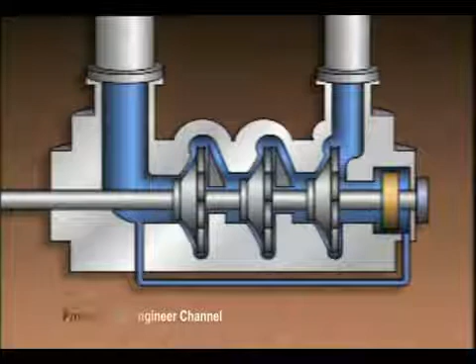This pump has a balance piston. During operation, some of the fluid leaving the pump flows along the shaft and exerts pressure against the balance piston. That pressure tends to force the pump shaft away from the suction eyes and reduces the total thrust. Any fluid that passes by the balance piston is returned to the suction side of the first stage.

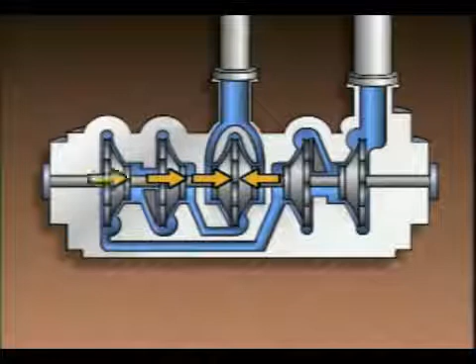Now on this pump, the arrangement of the impellers is used to offset axial thrust. Process liquid enters the first stage impeller from both sides, so the pressures on both sides of the impeller are equal. The suction eyes for the second stage and third stage impellers face in the opposite direction from the suction eyes of the fourth stage and fifth stage impellers.

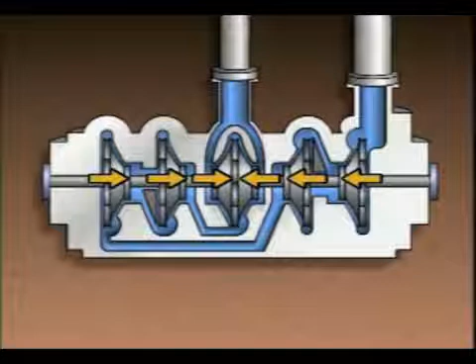Since the forces caused by axial thrust are in opposite directions, they tend to cancel each other out. As a result, axial thrust in this pump is kept to a minimum.

In this topic, we looked at the basic operation of several types of centrifugal pumps, including single-stage pumps, vertical pumps, and multi-stage pumps. Now let's try some practice questions that relate to this material.

Inside all centrifugal pumps, an impeller creates centrifugal force to move liquid through the pump. Impellers can be designed in different ways, depending on factors such as the type of liquid being pumped and the amount of pressure increase that's needed. The impellers used in centrifugal pumps can be divided into three categories: closed, open, and semi-open.

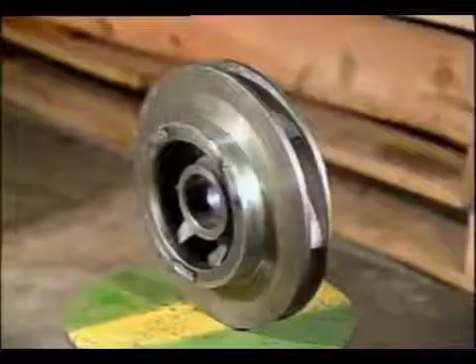This impeller is a closed impeller. Its vanes are enclosed by shrouds on both sides. The shrouds direct the flow of liquid between the vanes. Closed impellers are often used with low viscosity or thin liquids.

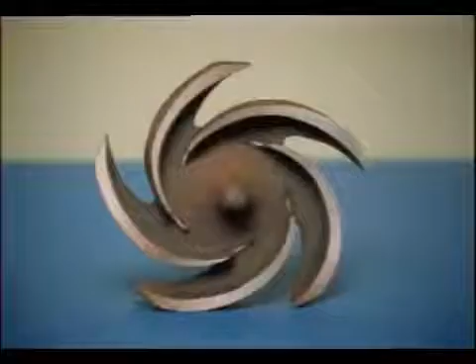Liquids that are thick or contain suspended solids could clog a closed impeller. With those types of liquids, an open impeller could be used. This is an open impeller. As you can see, this impeller has no shrouds to direct the flow of liquid.

While this design helps prevent clogging, it's less efficient at moving liquids than a closed impeller, since the flow of liquid is not directed between the vanes.

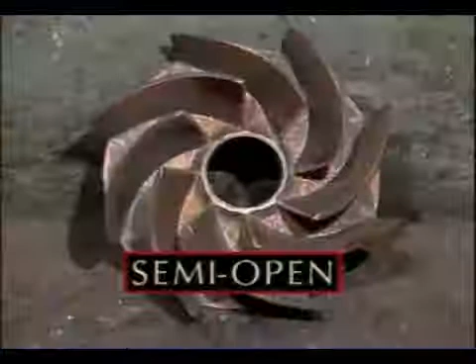Open impellers are used to pump thick liquids or liquids with solids such as slurries, and closed impellers are used to pump thin liquids. Semi-open impellers can be used for pumping thin liquids since there is a shroud to direct the liquid between the vanes. They can also be used for heavier liquids and slurries since they minimize clogging.

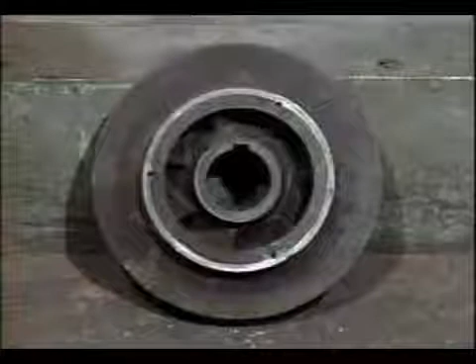Impellers can also be classified in other ways. For example, closed impellers can be further classified as single suction impellers or double suction impellers. This impeller is a single suction impeller. It has only one suction eye, so there's only one place that the liquid can enter the impeller.

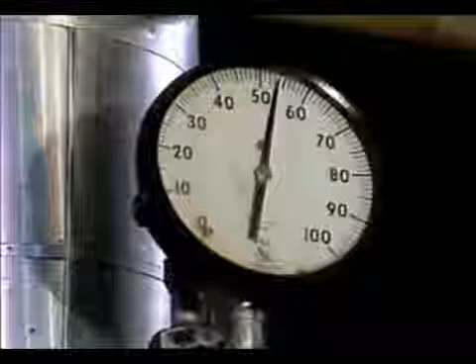Single suction impellers are fine in applications where the pressure change across the pump is relatively low. In applications where the pressure change is higher, large amounts of axial thrust are created and must be offset.

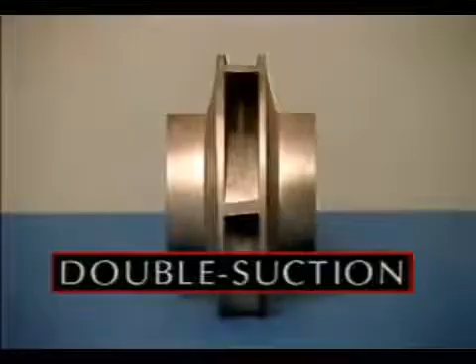To minimize the effects of the axial thrust, some centrifugal pumps use a double suction impeller. A double suction impeller has two suction eyes, so liquid can enter the impeller from opposite directions. Because of this, the pressure on both sides of the impeller is the same, and axial thrust is minimized.

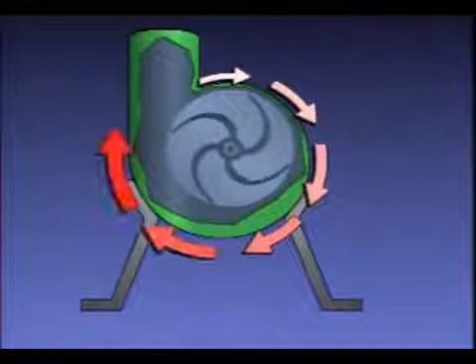No matter what type of impeller a centrifugal pump uses, the liquid being pumped gains pressure as it slows down to fill out the increasing volume of the volute.

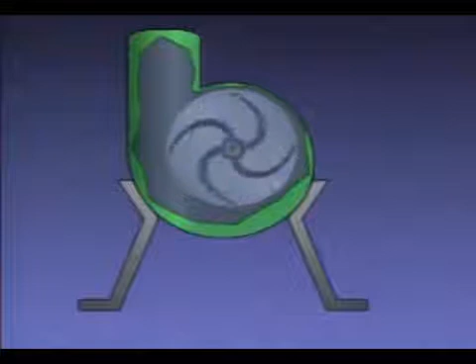Radial thrust is a type of thrust that tends to move a pump shaft perpendicular to its axis. In a pump with a volute, the thrust is created by the difference in pressure across the volute. Now, some centrifugal pumps are equipped with a component that accomplishes the same speed-to-pressure conversion as a volute, but minimizes radial thrust. It's called a diffuser.

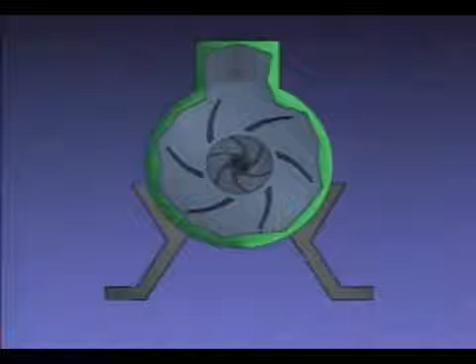A diffuser consists of a series of stationary vanes that surround the impeller. When we look at the vanes closely, we can see that the distance between the outer tips of the vanes is greater than the distance between the inner tips. As a result, the vanes create a series of small volutes all around the impeller. This arrangement of vanes balances the radial thrust around the impeller.

Pumps require some type of seal between the pump shaft and the casing to keep process liquids in and contaminants out. Some pumps use packing to seal around the shaft. Other pumps use a device called a mechanical seal.

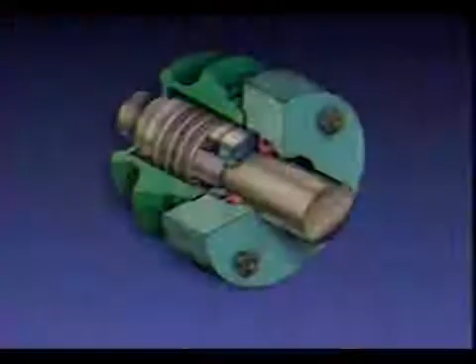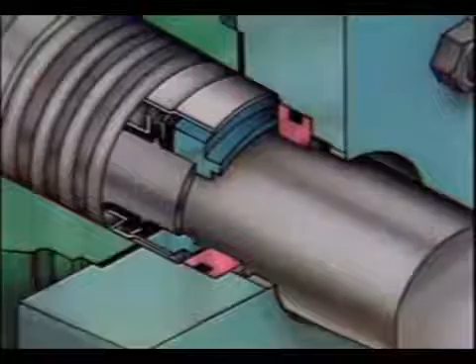On this cutaway of a typical mechanical seal, we can see the two basic parts: a stationary element that's attached to the pump casing and a rotating element that's attached to the pump shaft. Each element has its own seal ring. The two rings are positioned close together to form a seal that has virtually no leak-off.

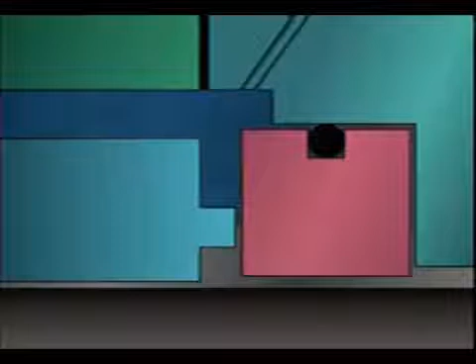To prevent the seal rings from being damaged, some type of lubricant must be supplied to them. In some applications, the process liquid being pumped is used as the lubricant, but that's not always the case. When the liquid being pumped could be hazardous if the seal fails, or if it contains abrasives or other solids, such as in a slurry, an external liquid may be used to lubricate the seal rings.

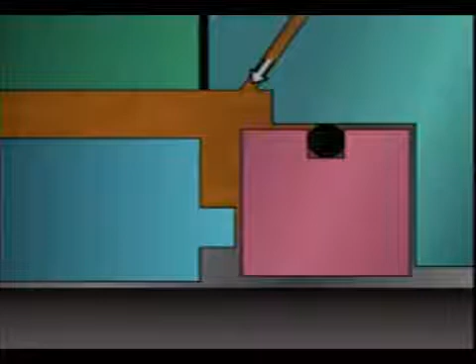Many facilities use an independent system to provide lubricating liquid to the mechanical seals of several pumps. This is a simplified diagram of a typical sealing system. It provides lubricating liquid to the mechanical seals on all of the pumps in a process.

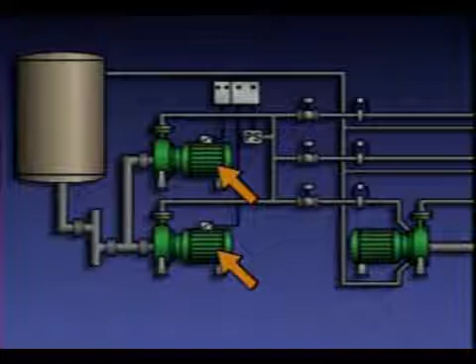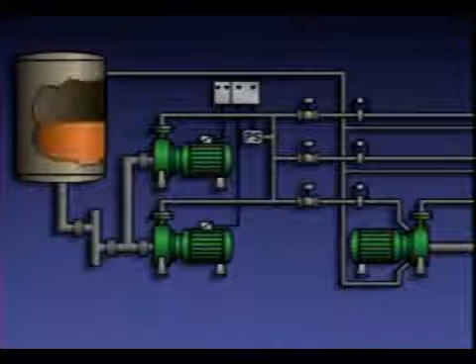The system consists of a storage tank, a filter, a supply pump and a backup supply pump, a low-pressure switch, a pressure regulator for each mechanical seal, and a flow meter for each mechanical seal. For this process, an oil is used to lubricate the mechanical seals.

During operation, the supply pump draws the oil from the storage tank through the filter. The filter removes contaminants from the oil to prevent damage to the sealing system pumps and the mechanical seals being supplied. The pump supplies the oil to the pressure regulators on each supply line.

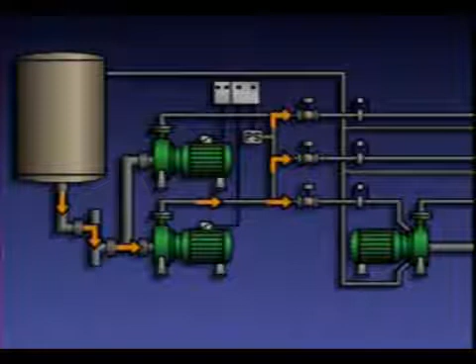The pressure regulators control oil pressure and the amount of oil flow to each of the mechanical seals. The flow meters allow the flow to the seals to be monitored. If the supply pump fails to deliver the oil at the correct pressure, the pressure switch will sense this condition and automatically start the backup supply pump to restore pressure.

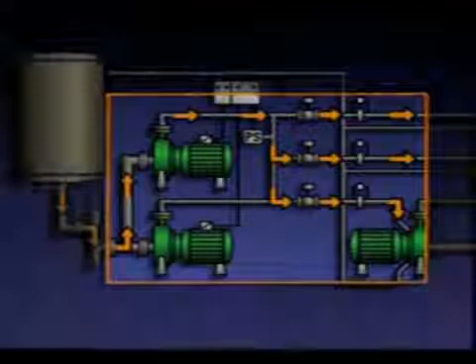At the mechanical seal, the oil lubricates the seal rings. The oil then passes by the seal, flows into the return header, and is sent back to the storage tank. From there, the oil can be reused.